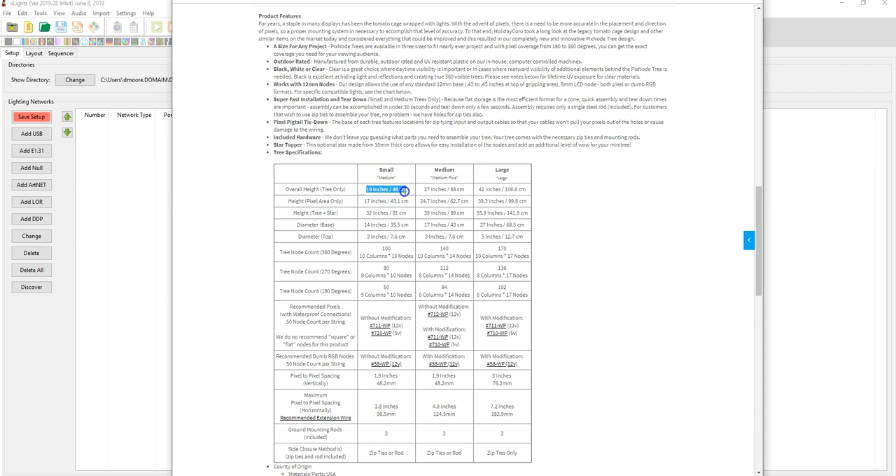Now, what we have here is we have to first decide what one we're going to use. Now, in our case, we're just going to start off with a very standard setup, which is 50 pixels, which is in 5 columns of 10 nodes on our 19-inch tree. So let's look at that tree here. So here's our tree, and this is the 19-inch, and you can see that we have a 180 here, and so we start 1, 2, 3, 4, 5, 6, 7, 8, 9, 10.

There's 10 pixels in each column vertically, and then in this case we're going to use 5 columns, 1, 2, 3, 4, 5. So we're not going to use this column, and we're not going to use these columns over here. So if you were going to start at 270, you'd start here, 360, start here, and those will vary depending upon what you're seeing in here. So look at how many columns. So for example, in our case of 270, we need 8 columns, 80 pixels. So keep that in mind.

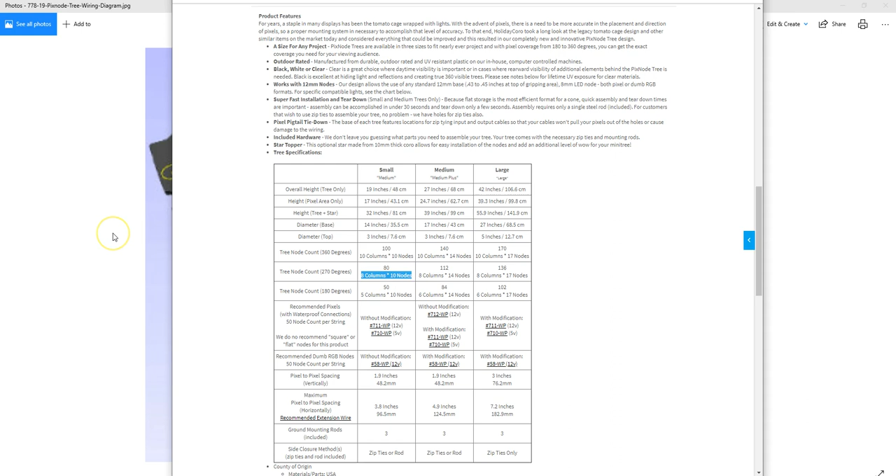All right, so the first thing we're going to do here is go into xLights, and we're just going to set up something fairly simple, and this is not necessarily going to match yours. So we're going to just set up something basic. I'm going to set up our default IP address on our controllers, and we're just going to assume in this case we're going to set up the 19-inch tree, 50 pixels, with a 20-node star on top of the PixNode tree. So that means we need 150 channels.

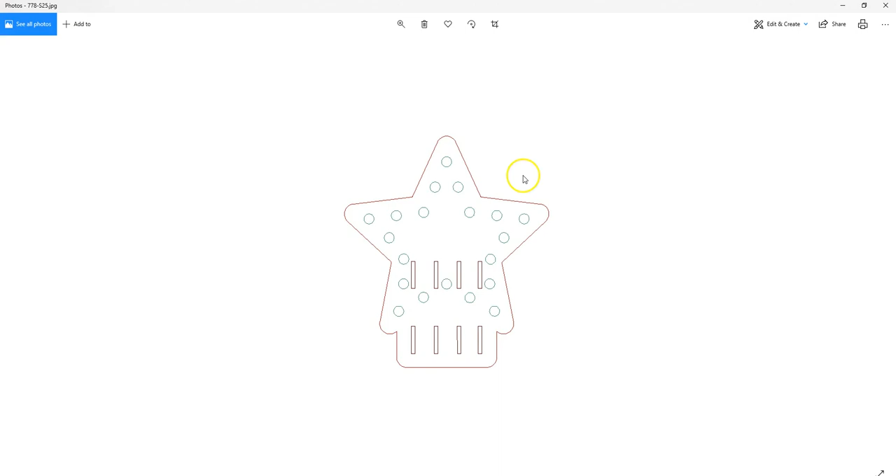So 19-inch PixNode tree, that's the tree portion. So again, 150 channels, which is 50 pixels times 3, which is RGB. I'm going to add another one here, 192.168.0.50, and we're going to just say universe 2. In this case, we're going to put 60, and we're going to do PixNode star, tree star. All right, 60 is of course because our star, which is optional, has 20 pixels. So we're going to go back to xLights, click OK.

So again, this could completely and almost surely will be different from your particular setup. So we just need something to show you here. Okay, so the first thing we're going to do is set up our tree. Now, we have a completely blank canvas here. If you have already started your display, you'll have a bunch of items here, maybe an outline, a matrix, a mega tree, snowflakes, arches, whatever it may be. You already may have a display. In this case, we're starting off with just a single element, the PixNode tree and the star.

Okay, so we're going to go up here to the Create Tree, and then I'm going to click on that. I'm going to go down here with my left mouse, and I'm just going to drag there. And you can see it creates a tree. I'll just give it a name here, PixNode Tree 19-inch number 1. All right. Oops, I'm sorry. We could put a quote there.

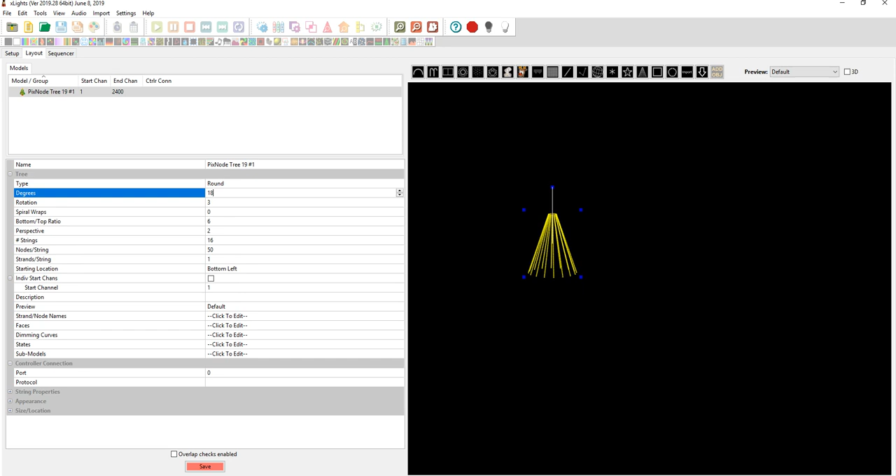PixNode Tree 19 number 1. All right. Now, our tree is round, but it is not 360 in this setup. We're going to do 180. Now, rotation just depends upon how you want it to visually look, so we're just going to leave it at 3. We do not have any spiral wraps here. This is going to be just straight up and down. We're going to go up and down, up and down, up and down.

The bottom-top ratio, typically 5 works best. This is the ratio between the hole in the top and the hole in the bottom. So 5, you'll see that opens it up a little bit. And the perspective is how you're viewing it, whether you're viewing it from straight on. And in this case, if you want it straight on, you can see 0 is the number you want. Or you can look at it slightly at an angle, or maybe less than slightly at an angle. So we're just going to put it 3, which might be more typical of a viewing angle where viewed from a car or standing in front of it.

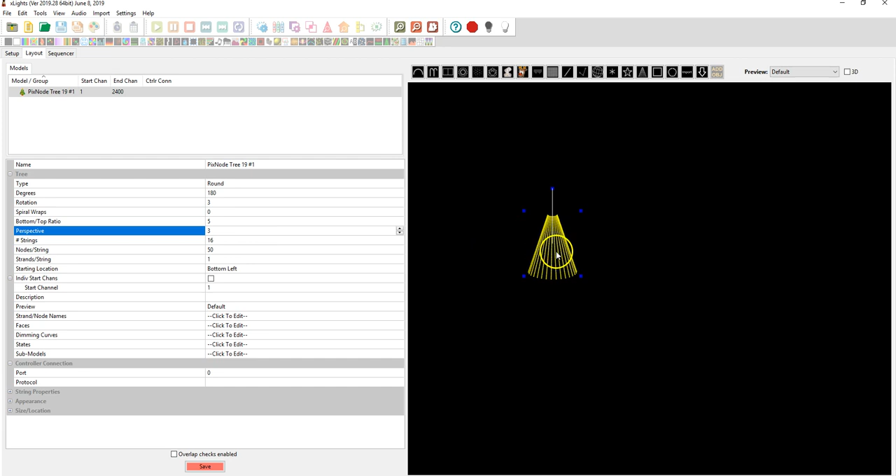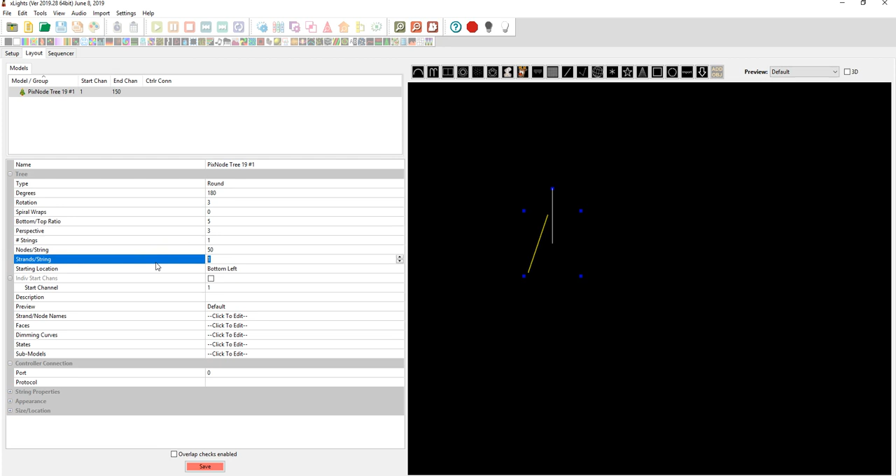Now, how many strings do we have? We have one string because this particular tree is going to use one 50 count string of pixels. So we have one. And how many nodes are on that string? There are 50. So we can see this put 50 in a single line here. That's not right. So what we need to do is tell it how many strands there are. So in this case, we have 5 vertical strands. So you can see now it's taken those 50 nodes in one strand and broken them out into 5 10-node strands, which is exactly what we want.

Now, starting location is shown here, is viewed from the front. So this assumes the starting location, meaning where are our pixels starting? That means this pixel right here is where we're starting, viewed from the front of the tree. So as if we're looking at the tree and we look at the wire, it's coming over here and it's hooking up to this pixel going up. Well, we're not going to wire them that way. So let's go back and look at our tree. We can see that in this design, it shows us that we start a pixel here and go up, then over. This is shown from the wiring side. So keep that in mind when you're configuring this.

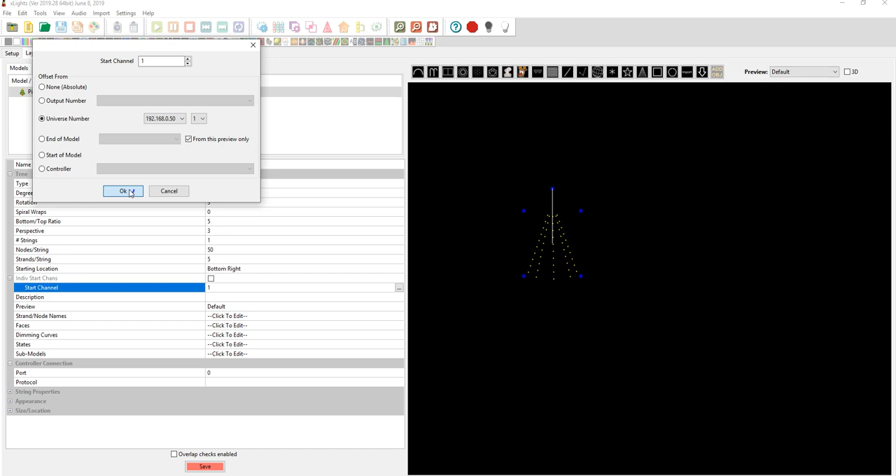So we're going to say bottom right. So we want bottom right. So this means the pixels are coming in over here on the right-hand side, going up and then down, up and then down, up and down. Now, you can choose to do it any way you want. It's completely up to you. Now, the next thing we're going to do is go over here and say the start channel. And I can be very explicit and just say, here, this IP address, this universe, and I want that specific thing. Now, you may be using absolute addressing, or you might have the star at the end of the tree model. There's all different kinds of options here, but again, this is just what we need for our setup.

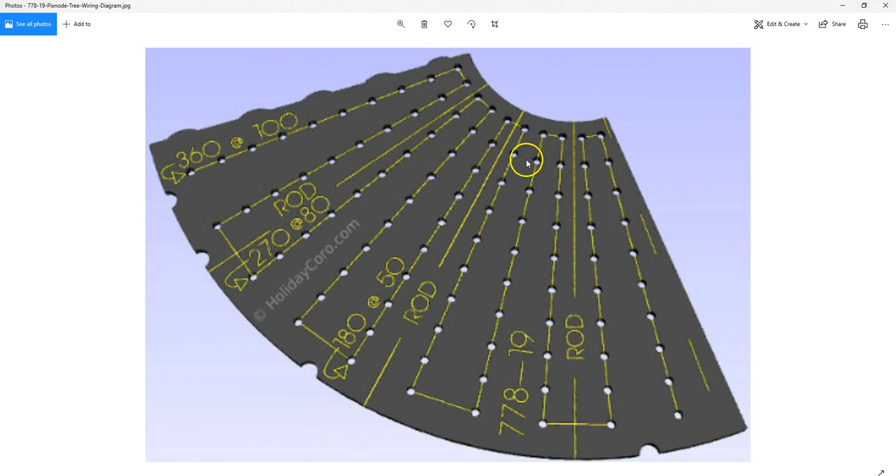So what we're going to do here is just a little bit of a sanity check. We're going to go over and right-click here. We're going to say wiring view, and we're going to look at how xLights thinks it is wired. Now, keep in mind it says caution reverse view. This is viewed from the back of the model. So this, you'll see, matches this. So we have it starting over here, going up and down, and we should have the same thing here. Pixel 1, going up 10, 11, jumping over. So this 20 to 21, for example, that is right here, right there. Okay, so everything looks good. You can see 50 pixels. So we're good to go there.

So we've finished our tree model. So now let's just put a star on it. So what we're going to do is just go over here, click on create a new star. I'm just going to drag a star up here, move it over a little bit, and there's our star.

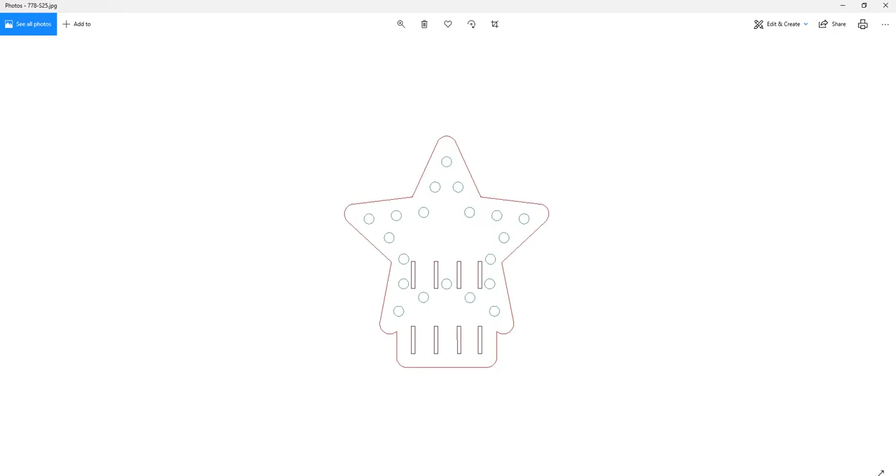Now, just to recap here, the star has 20 pixels, and we're going to start wiring them going this way, the way we typically do it, which is to the right-hand side. This is viewed from the back. So first pixel, second pixel, third pixel in this way when we wire them in.

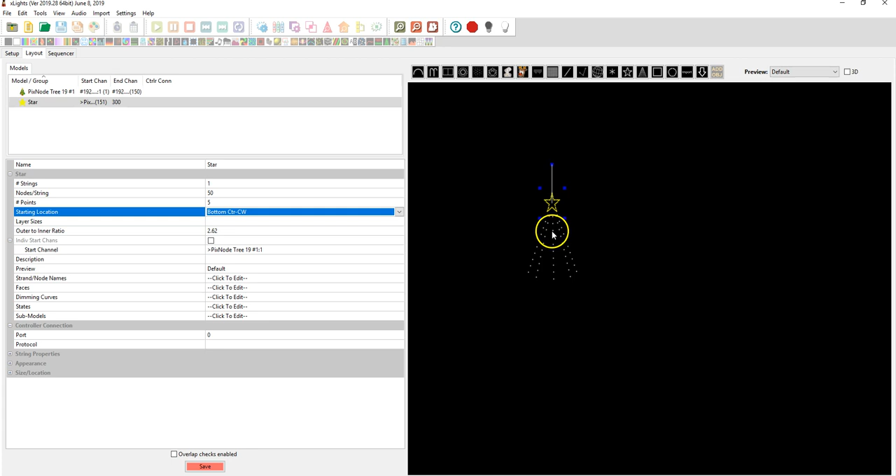And so what we want is, again, this is viewed from the front. So it's bottom, center, and then it will be clockwise. When it's viewed installed, it's going to go clockwise because it's going to go backwards. And in this particular case, it's trying to pick up the last pixel here of the model. In this case, what we're going to do is instead say very specifically, go over here and use this universe and that channel. Okay. And so now we have set that up.

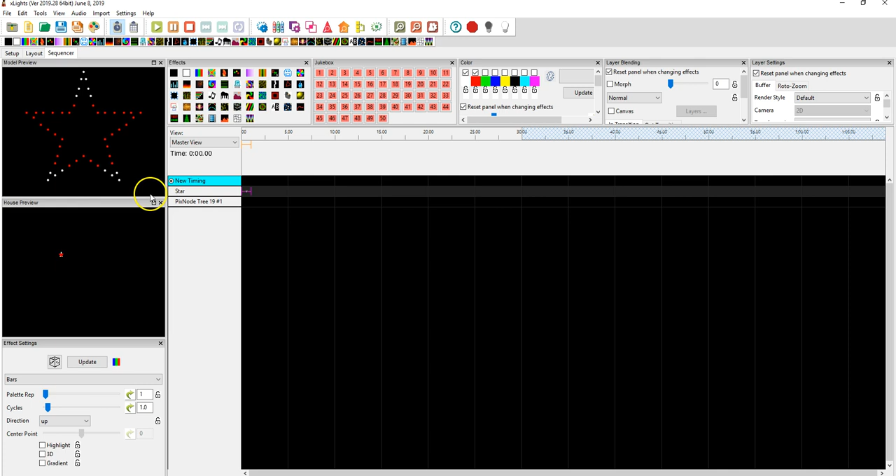Now we're going to go over to the sequencer here and say File, New Sequence, Animation, Quick Start, just so we can get something in here. We're just going to take the bars and drag it down here, and we can see that we've got top to bottom. That's looking good. And if you wanted to, you can also put similar effects down here on your tree. You can see that there is a direct relationship. The fire is starting from the bottom and going up, and it shows the appropriate pixels. And we're all set there.

So now let's go back here to layout and see what we need to do to make more of these. If you need to make more of these, you have 5 of them, for example, you just select them and you can say Control C or copy. So I'm just going to say Control C, and then Control V, and I'm going to paste them and put them throughout my display as appropriate.

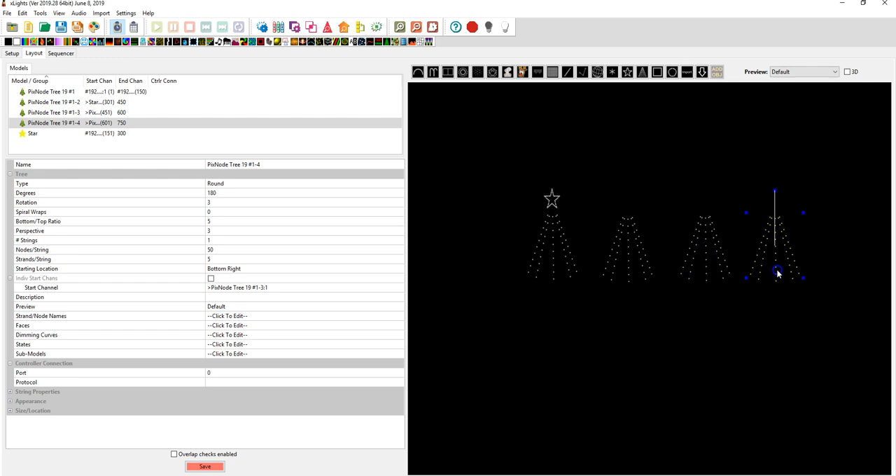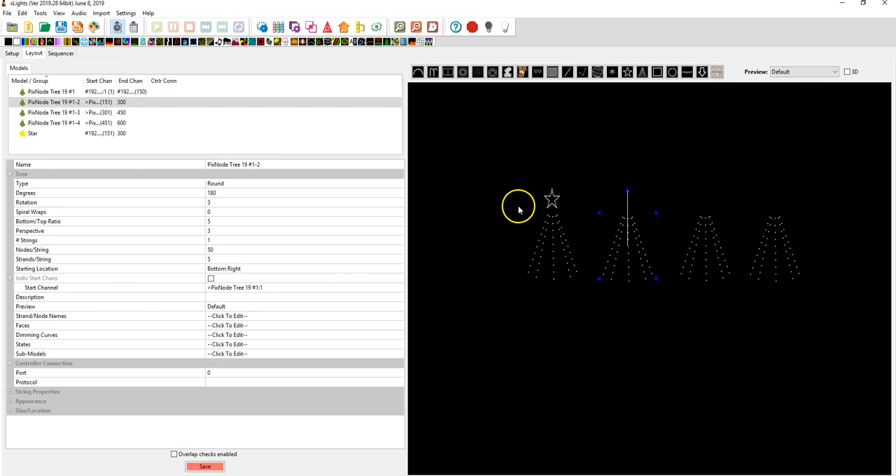Now you will need to go back in here now that you've done that, and you will need to tell it exactly which thing it's mapped to. So which output, which universe, channel, however you have that set up, you will need to adjust each one of those to a very specific start channel for not only the star, but also the tree. All right, so let's remove those.

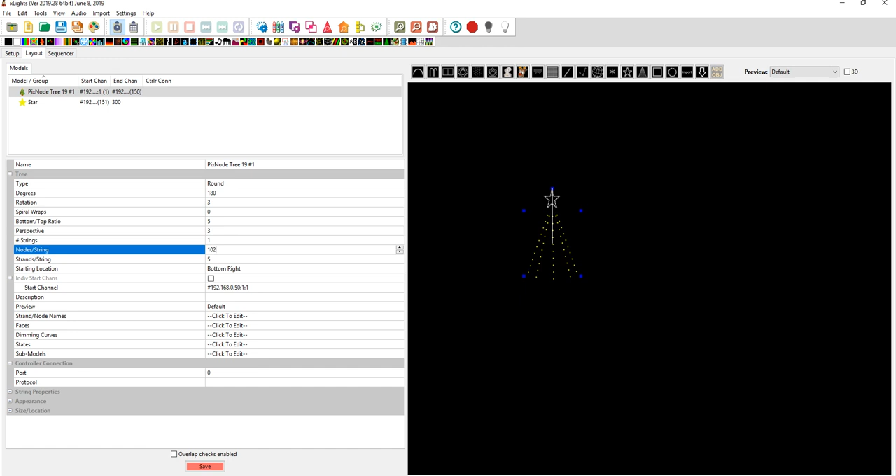And now let's look at some other tree. Let's say we want to do a different tree. So let's go back here. Let's say that we're going to do the large tree at 180 degrees. So here we have 6 columns at 17 nodes for a total of 102 pixels. Okay, so what we're going to do here is 6 columns, 17 nodes. So we need our string to be 102.

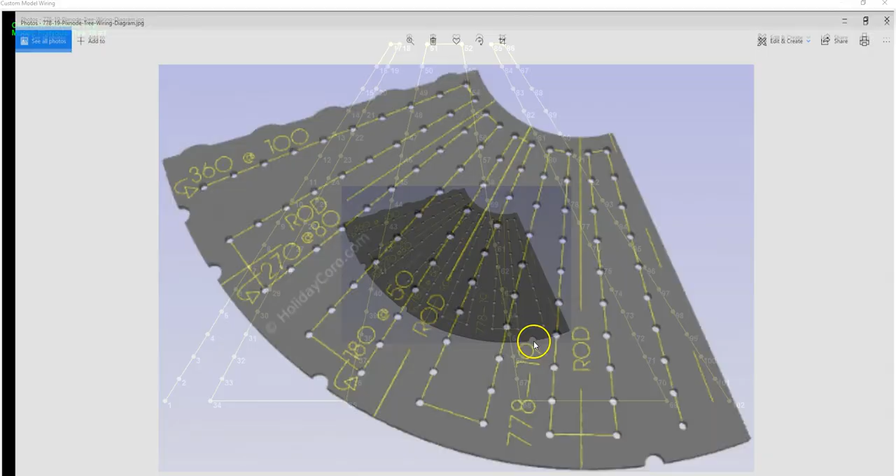So let's go back here, look here. We have 6 columns. We're going to start off in the bottom right-hand corner. And you can see that it's made that adjustment. So let's just right click over here and say wiring view. And you can see we have 102 pixels. In that particular setup, we would start here, go up and then down, and then we end down here. And you can see that we do.

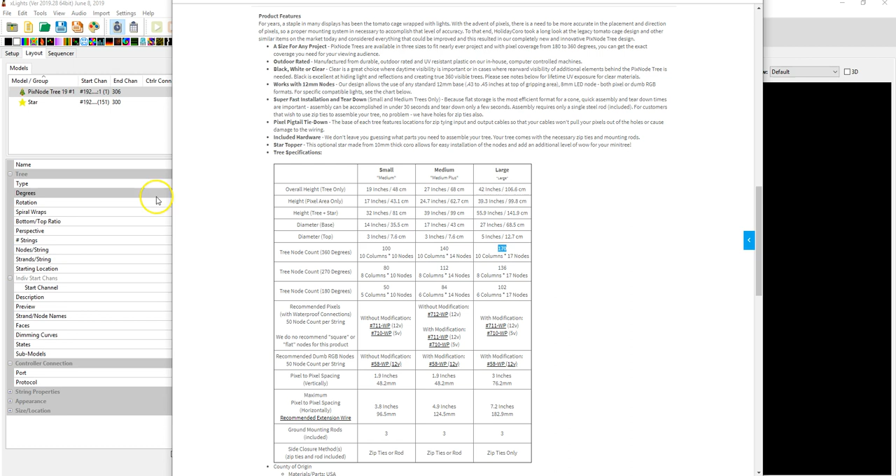All right, so let's just try that if we were to do a 360 tree. So we'll do 360. Let's go back and look at our setup for 360. With 360, we have 170 pixels, 10 columns, 17 nodes. So we have 170, we have 10 columns. And there we go. And we can right click and say wiring view.

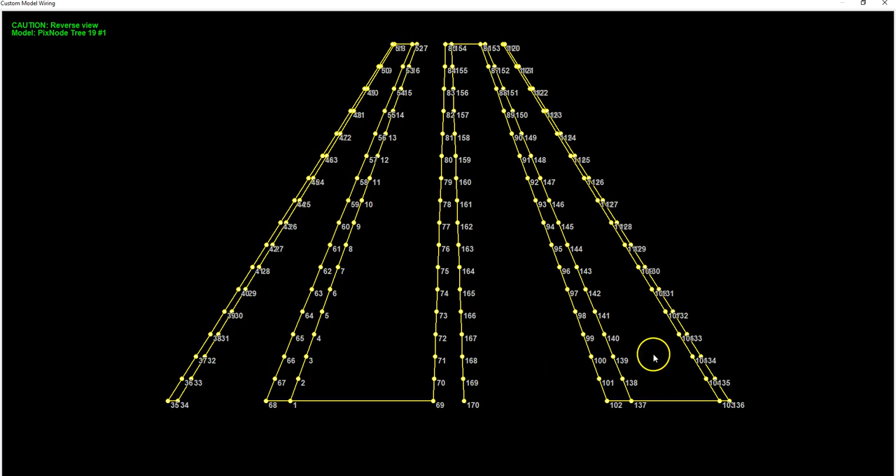This may not look pretty because these are overlapping because you have 360 degrees. So we're actually starting here, going up and then down and then up and then down. So that does appear to be correct. 170, 10 columns. Yep. So hopefully this has been helpful in allowing you to figure out how to properly set up a model for the PixNode tree.